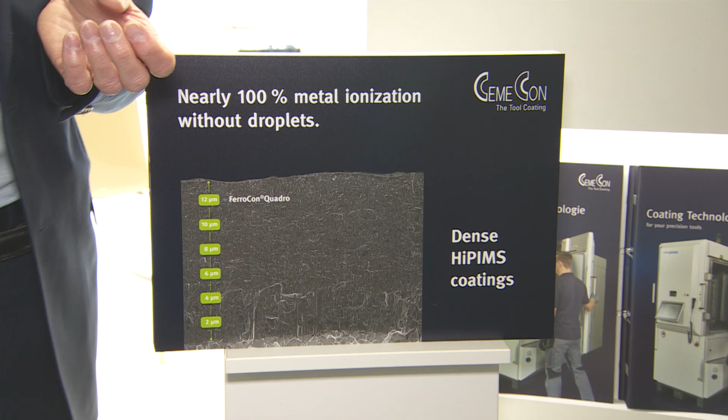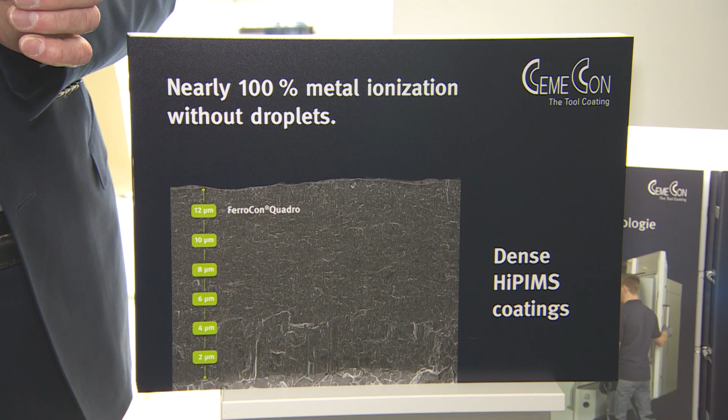Let's go a little bit into the benefit of HiPIMS. The most important thing is it decreases the grain size of the coating material. Smaller grains mean more grains per volume, and this means a tougher material—hardness and toughness at the same time. That's the major breakthrough in HiPIMS: beyond the conventional properties of a coating material, you add toughness to the whole thing, and this helps you keep the coating where you need it most, on the cutting edge. So it's a dense coating while still having a super smooth surface, that's the point.

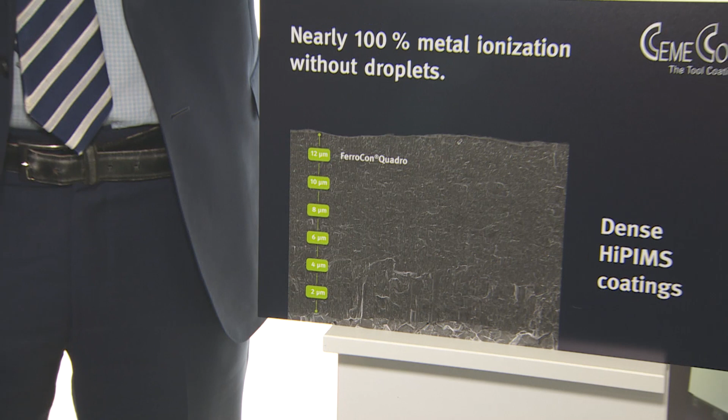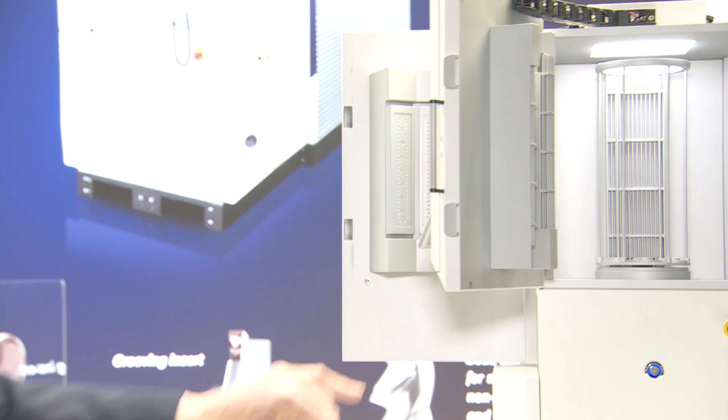The other thing you nicely see here on the screen is 12 micron coating thickness, that's unprecedented in PVD technology. The other new thing in HiPIMS is managing intrinsic stresses in the material. The way we do this is by controlling and synchronizing the pulsation on the evaporators, on the target, with the pulsation on the bias of the table. While doing this, we attract only the metal species from the target that we'd like for building up the coating, and we suppress unwanted things. So that's the first time in coating technology that you can actively manage the intrinsic stress in the material. Toughness and stress management—these are two of the main novelties in HiPIMS technology that help you for cutting tools.

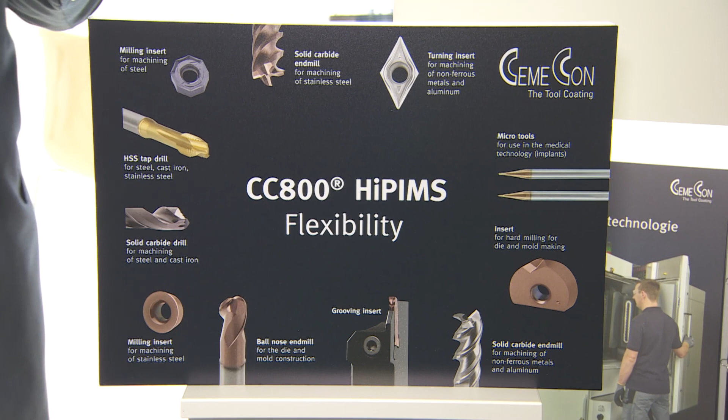The other thing about HiPIMS, besides smooth and dense coatings, is flexibility. When you see this selection of tools here: a tap drill you would conventionally do with an e-beam machine; micro tools, only sputtering works because you need a droplet-free process; for a heavy-duty milling insert you need a thick coating. Typically for each of these applications you need a dedicated separate machine. Now with HiPIMS you can do all these tools with one piece of equipment. So flexibility, that's what it's all about.

In the troubled times we are living in, nothing is more important than flexibility. Nobody knows what you and your customer would like in terms of cutting tools a couple of years from now. So when you take HiPIMS technology, your investment is future-proof.

Let's go a bit into application. One of our latest products is called SteelCon, a high silicon doped coating material. More silicon gives high wear resistance just from the material properties.

The point of these super micro milling tools, for example dental implants made from chromium cobalt, is a very small tool with a super sharp edge. The high silicon doping adds toughness and low stress, so you can achieve a known silicon composition on super small tools, keep a sharp cutting edge, and be free of any voids or microparticles.

So here you have an ideal application of HiPIMS for a growing market in medical and dental care: micro cutters. Of course such a tool is classical for high speed cutting, where you typically have dry machining to avoid oil or emulsion for economical and ecological reasons. So with this new product, the HiPIMS technology adds something to your market range.

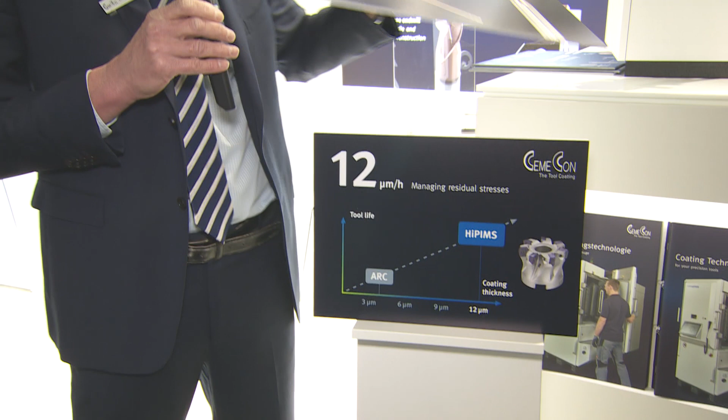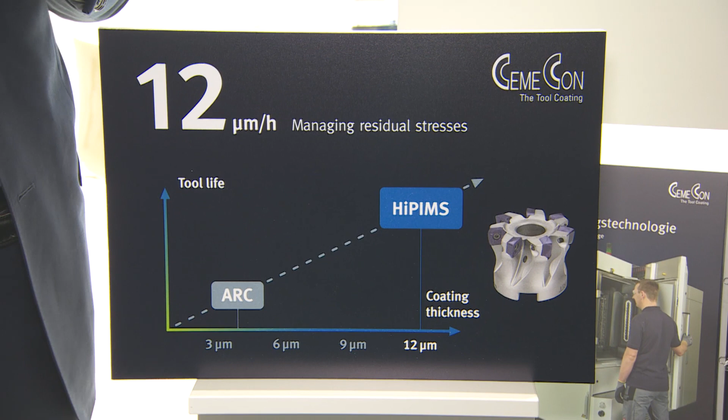When we move into a different area, high performance cutting, where everything is about high feed and high depth of cut, every micron of coating counts. So you have to find a way to increase your coating thickness up to 12 microns in PVD.

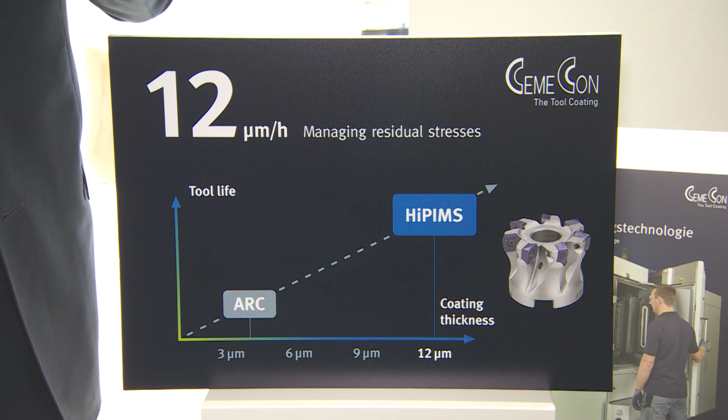The big advantage of PVD is that you have compressive stresses, unlike other technologies like CVD, where you always have tensile stresses. That's what you can do in HiPIMS, with CemeCon's unique feature of managing residual stresses. Then you can go on cutting inserts up to 12 micron as a production process. So here again, something quite unique and new which shows the superior benefit of HiPIMS technology for cutting tools.

When it comes to production, speed counts. Your customers are impatient, so high deposition rate is one thing we feature. 2 micron in pure HiPIMS is unrivaled.

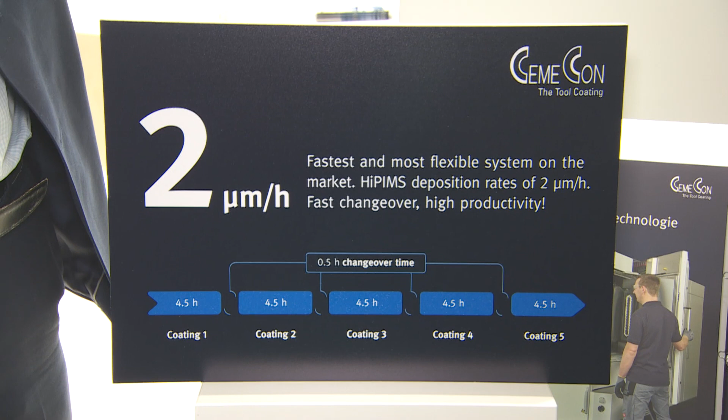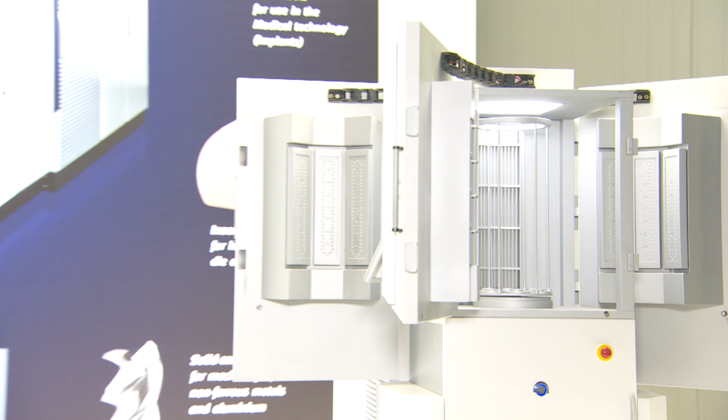The other thing with this machine is that you can open the coating vessel on 3 doors. The evaporators are on the side door, with planar targets which are very easy and swift to change, just by changing plates. You don't need to disassemble any machine elements like in other equipment. So that's a typical workhorse machine which makes production easy and swift for you.

On the other hand, if you're developing something specific to your tools, the electronics behind the screen are fully accessible to you as a development engineer. You can access all the HiPIMS parameters, and when it comes to data and data mining, our machines feature OPC UA, the latest tech in data management, so you can access and store all data.

So also from this point of view, this HiPIMS piece of equipment features the latest elements available today in data management.

In the introduction we talked about running a quite huge coating center here in Aachen. Actually, it's the largest coating center for cutting tools in the world. And from this experience we know, yes, we need such a machine.

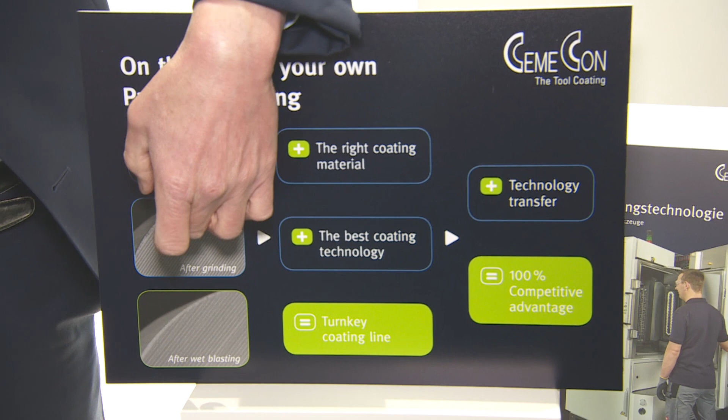But you also know from your knowledge in making cutting tools that things like activating a surface, finishing a cutting edge with blasting technology, washing technology, are at least as important as the coater itself. Here we can help you set up a turnkey plant in your production, from all our experience and knowledge doing it at CemeCon and at our customer sites.

But all this comes from our long-term experience with almost any cutting tool available on the market.

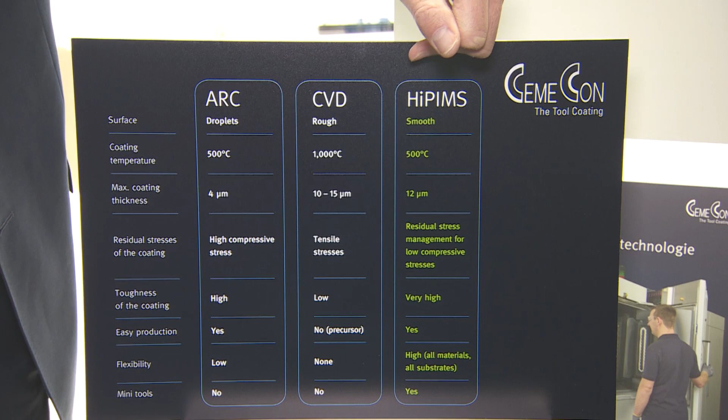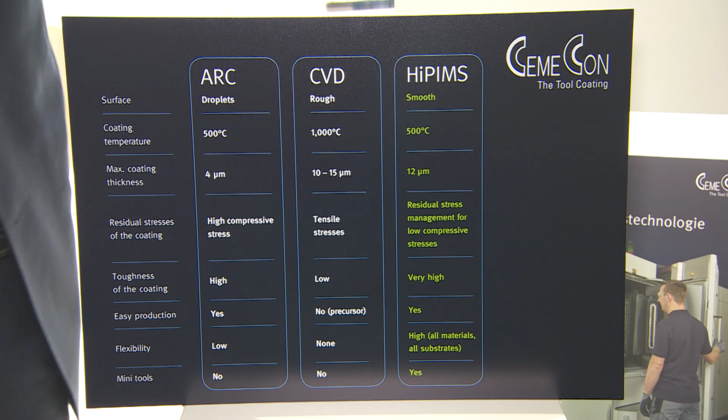I hope I could show you a little bit about the benefits of HiPIMS for cutting tool production. When we compare it to other technologies, there are a lot of benefits for HiPIMS. We are smooth, we manage stress, which means we have toughness in the material, or we add toughness to already existing properties. We can do it up to 12 micron, and it's ideally suited for micro tools.

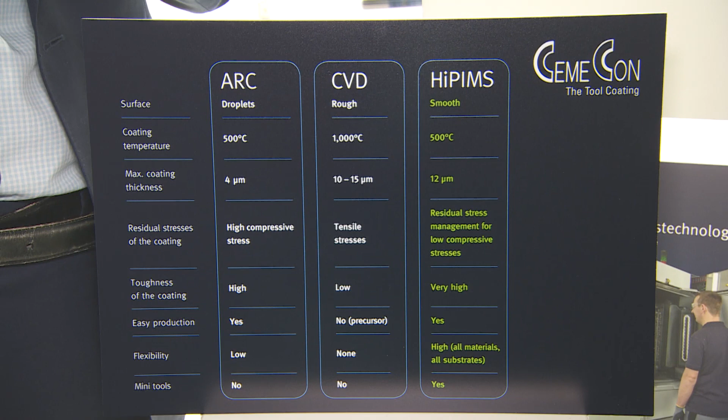Objects around us are getting smaller, so cutting tools are getting smaller too. I'm clearly of the opinion that HiPIMS is exactly the future for cutting tools and for your cutting tool production. I hope I could show you in the last minutes a couple of these points, and I'm more than happy if you'd like to go into details.